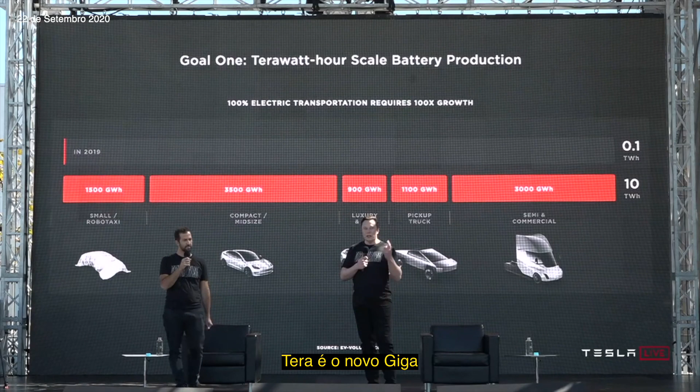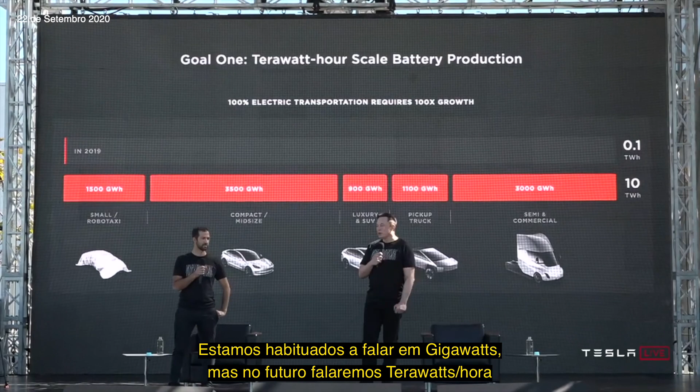Goal number one is a terawatt-hour scale battery production. Tera is the new giga. A terawatt is 1,000 times more than a gigawatt. So we used to talk in terms of gigawatts. In the future, we'll be talking in terms of terawatt hours. This is what's needed in order to transition the world to sustainability.

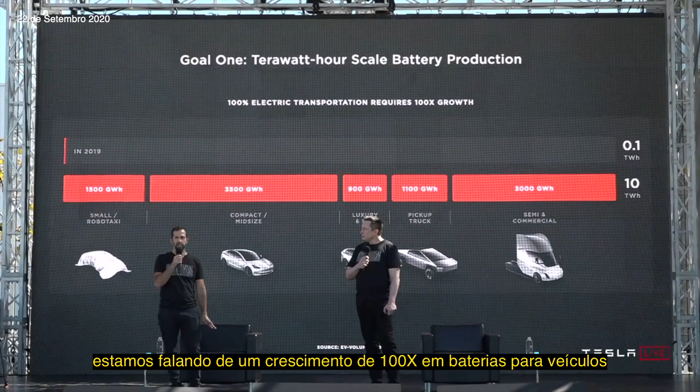And you can see we're talking about 100x growth in batteries for electric vehicles to achieve this mission. And we are going to get there. It's just a matter of how fast, and our intention is to accelerate it.

You basically need on the order of roughly 10 terawatt hours a year of battery production to transition the global fleet of vehicles to electric. And the average vehicle lasts 15 years, so we're talking about 150 terawatt hours, give or take, to transition all vehicles of all types to electric. So it's a lot of batteries, basically.

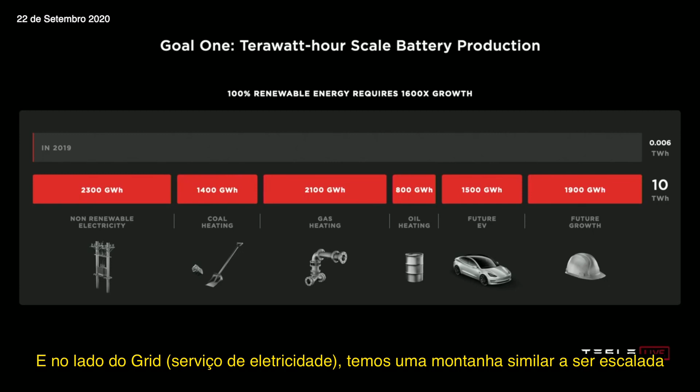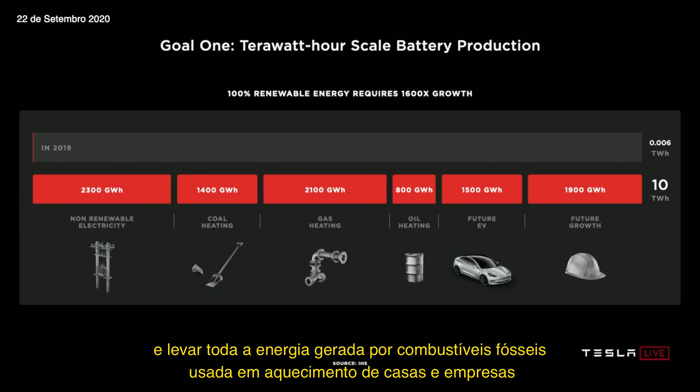And then on the grid side, we have a similar mountain to climb: 1,600 times growth from today's grid batteries to go 100% renewable on the grid and to take all of the existing heating fossil fuel uses in homes and businesses 100% electric. And this number, I think, might grow even more as the world economy matures and as countries with high populations industrialize, we could see this number be even more.

But let's say it's like roughly 20 to 25 terawatt hours per year, sustained for 15 to 25 years, to transition the world to renewable. This is a lot.

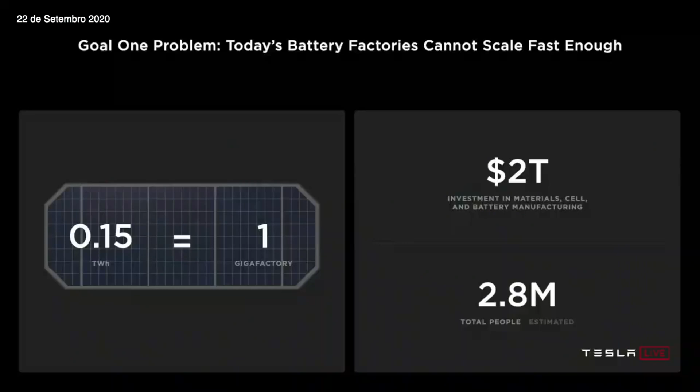So today's battery factories cannot scale fast enough. They're just too small. For Giga Nevada, 150 gigawatt hours per year is like what we probably expect to make out of there, but this is really pretty small in the grand scheme of things. That's only 0.15 terawatt hours. We would need 135 fully built out Nevada gigafactories to achieve 20 terawatt hours a year. It's not a scalable enough solution.

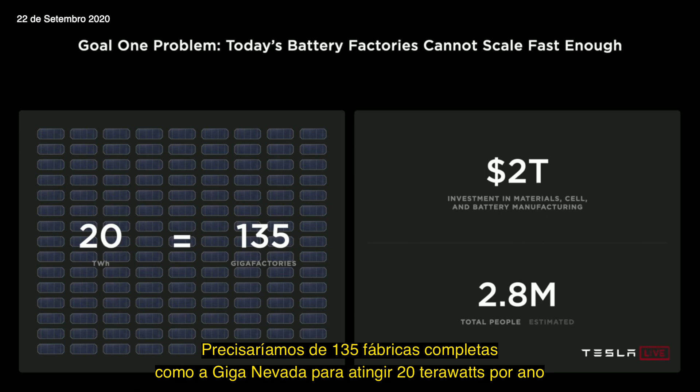We need a dramatic rethink of the cell manufacturing system to scale as fast as we can and should. It's not just a question of, well, if we had $2 trillion, tomorrow you could make this.

It's not that easy. You actually need to organize a massive number of people, build a lot of machines, build the machines that make the machines. And so it's incredibly important to have that effort yield the most number of batteries.

To make the best cars in the world, we design vehicles and factories from the ground up. And now we do this for batteries as well. So let's get started. We have a plan to halve the cost per kilowatt hour.

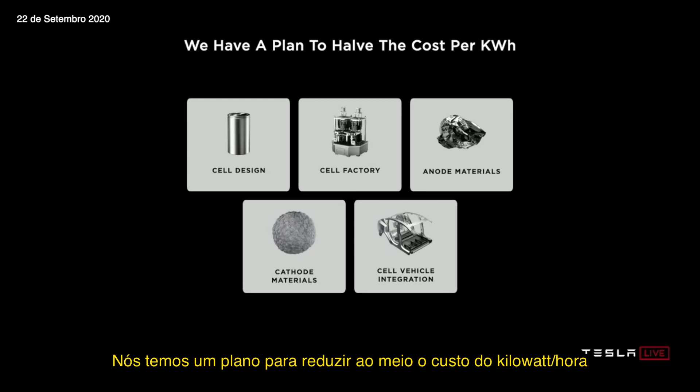And it's not a plan that rests on a single innovation, some research project that'll never see the light of day. We're going to go through that plan with you today, step by step, and build up how we get to these goals and how we accelerate this transition and make our vehicles and our grid batteries more affordable. We basically thought through every element of the battery, well, almost every element. There are a few more elements that we won't get to today, but we will get to in the future.

So first, before we get too far into it, let's talk about what is in a battery cell. We've got the cap and the can, negative and positive terminals of the cell. When you open that cell, you've got a tab connected to those terminals, what we call the jelly roll, which is the wound electrodes on the inside. You can actually see what this looks like as you unwind it. This is over 1 meter long in a typical 2170 cell, so it's quite a long winding process. And you can see the tab still there.

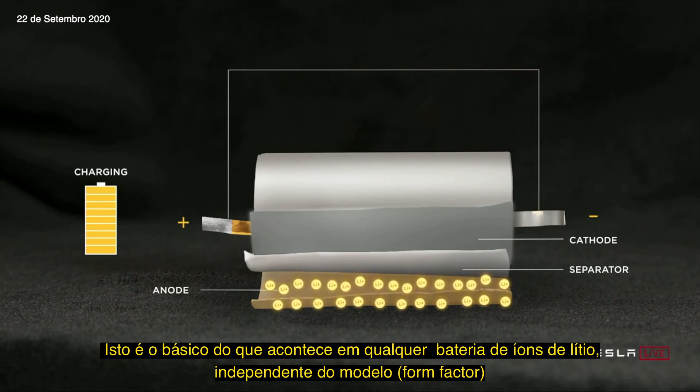To explain what's actually going on here, we've identified the anode, cathode, separator, and positive and negative terminal. Watch what happens as we discharge the cell: lithium moving from anode to cathode, and then the reverse. When we charge the cell, lithium moves from cathode to anode across the separator. This is the basic process behind all lithium-ion batteries, no matter what the form factor is.

When we look at what's happened to date, at least in our products, we've moved from the 18650 form factor to the 2170 form factor through great collaboration with our partners, Panasonic, and new partners like LG and CATL, and probably others in the future. This was an evolutionary step going from 18650 to 2170, bringing 50% more energy into the cell.

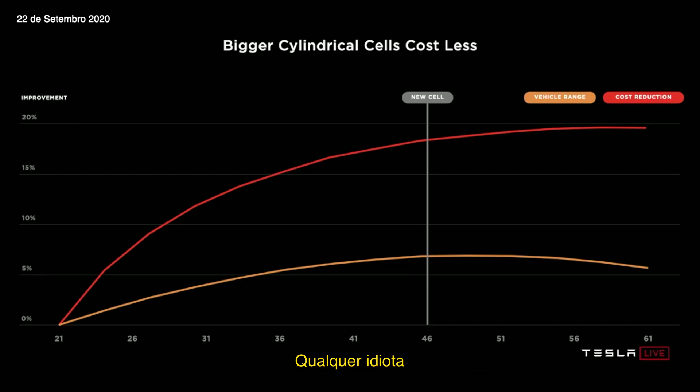But when we look to the ideal cell design, if we were to do it ourselves, we need to go beyond and study the full spectrum of options: how much we can reduce the cost and how much vehicle range increases as we change the outer diameter of the cell. But it's not just about a bigger form factor. Anybody could make a bigger form factor. Any fool could make a bigger form factor. We're not any fool.

There are problems as you make cells larger. In fact, supercharging and thermals in general become really challenging as you make bigger cells. This was the challenge that our team set our sights on to overcome, and we did. We came up with this tabless architecture that basically removes the thermal problem from the equation and allows us to go to the absolute lowest cost form factor and the simplest manufacturing process.

This is what we mean when we talk about tabless. We basically took the existing foils, laser patterned them, and enabled dozens of connections into the active material through this shingled spiral you can see. With simpler manufacturing, fewer parts, 50 millimeter versus 250 millimeter electrical path length, which is how we get all the thermal benefits. This is important to appreciate - basically the distance that electron has to travel is just much less.

So you actually have a shorter path length in a large tabless cell than you have in the smaller cell with tabs. This is a big deal. So even though the cell is bigger, it actually has more power. The power to weight ratio is actually better than the smaller cell with tabs.

This is quite hard to do, so nobody's done it before. Sometimes what's elegant and simple is still hard, and it took us a lot of trials, but we're happy where we ended up. It may sound a bit silly to some people, but for people that really know cells, this is a massive breakthrough.

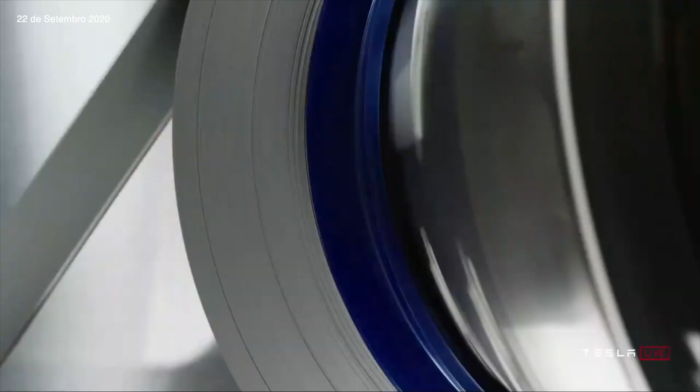It's a video of some of what's going on in the plant.

To be clear, it will take about a year to reach the 10 gigawatt hour capacity. This is important to appreciate. When you build a factory, there's a certain capacity that you design to, and then it takes some period of time to actually achieve that capacity. So I'd say it's probably about a year before we get to the 10 gigawatt hour annualized rate with the pilot plant. And this is just a pilot plant. The actual production plants will be more on the order of maybe 200 gigawatt hours, maybe more over time.

So just the cell form factor change enables a 14% dollar per kilowatt hour reduction, just that cell form factor change.

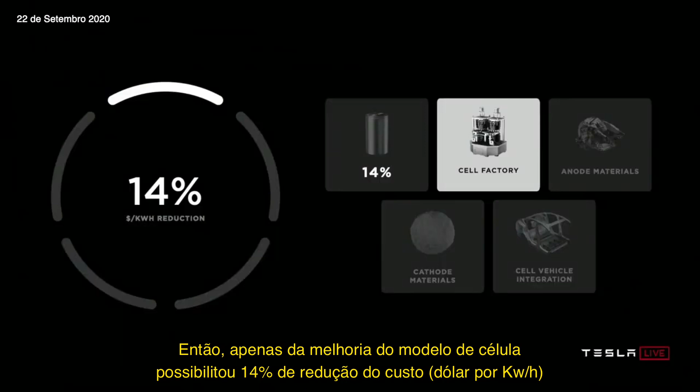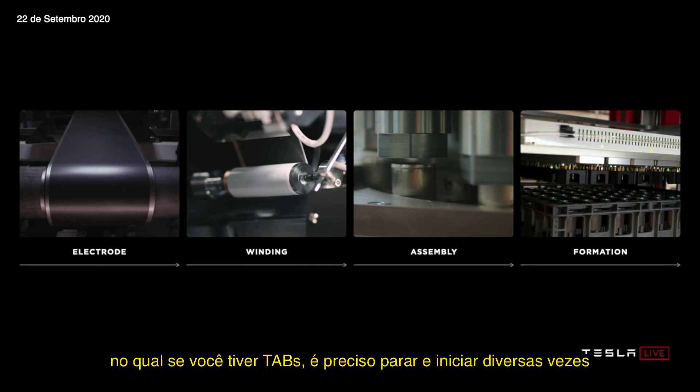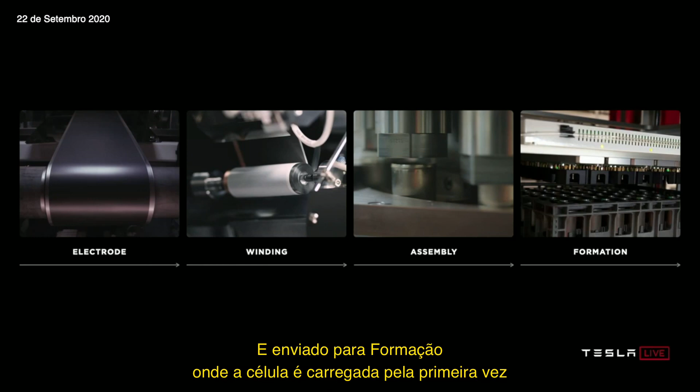Let's talk about what's in a cell factory. First, there's an electrode process where the active materials are coated into films onto foils. Then those coated foils are wound in the winding process we just talked about, where if you do have tabs, you have to start and stop a lot. Then the jelly roll is assembled into the can, sealed, filled with electrolyte, and sent to formation, where the cell is charged for the first time, and where the electrochemistry is set and the quality of the cell is verified.

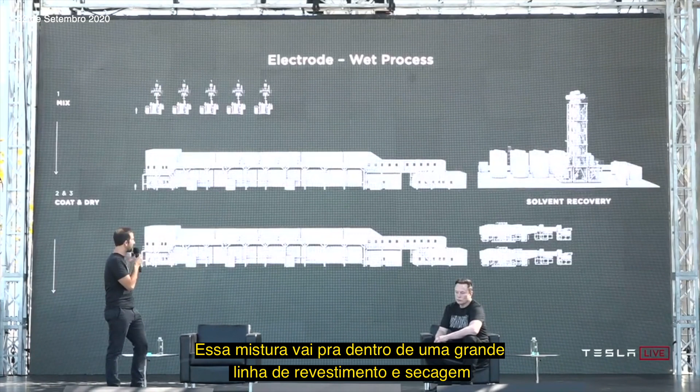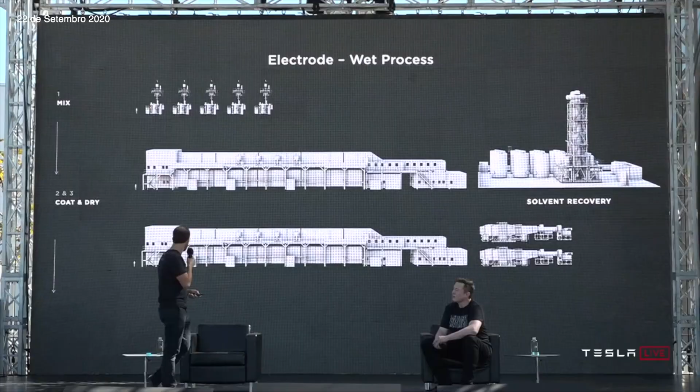One of the most important processes is where it all begins, the wet process of the electrode coating. To give you a sense of scale, I'm going to walk through that wet process. You've got mixing, where the powders are mixed with either water or a solvent, solvents for the cathode. That mix goes into a large coat and dry oven, where the slurry is coated onto the foil, huge ovens, tens of meters long, dried, and that solvent then has to be recovered. You can see the solvent recovery system. Then finally, the coated foil is compressed to the final density.

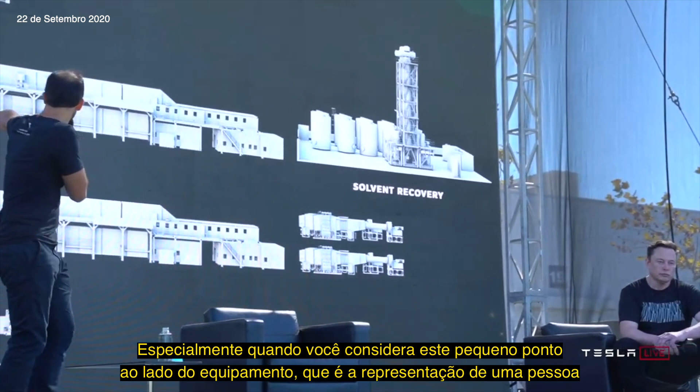When you're looking at this, you're like, wow, that's a lot of equipment for one step, especially when you consider that little speck next to the coating oven is a person. This is serious iron involved in making batteries.

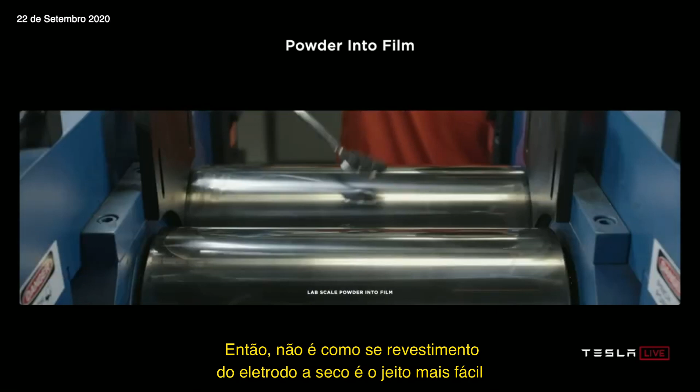Wouldn't it be great if we could skip that solvent step, which is one of those dig a ditch and then fill it kind of things, where you put the solvent in and then take it out and recycle it, and just go straight to dry mix to coat? That's what the dry process really is about. In the most basic form, you can see it here on a bench top. Literally, powder into film, as simple as that. I mean, it's hard, actually, just to be clear. If this was easy, everyone would do it. It's not like dry coating electrode is actually easy. It's actually very hard to do what appears to be a simple thing. It's insanely difficult to scale up.

But as Elon was saying, simple is hard. Yeah, and beyond the electrode, we continue to innovate on every other process step. So let's talk a little bit about assembly, which is next.

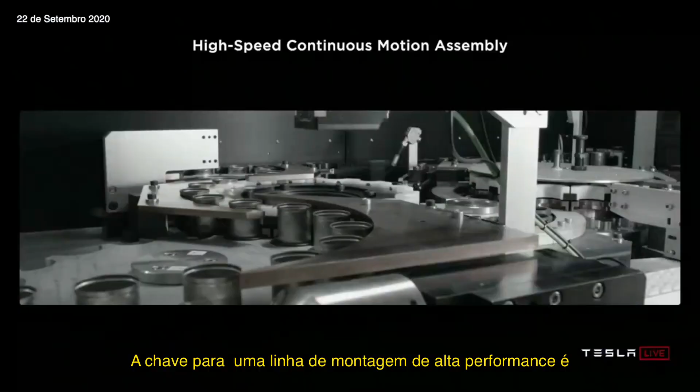The key to a high-performing assembly line is accomplishing processes while in continuous motion, and thinking of the line as a highway, max velocity down the highway, no start and stop, no city driving. Exactly, no stoplights or anything. You want the highway. I want the highway.

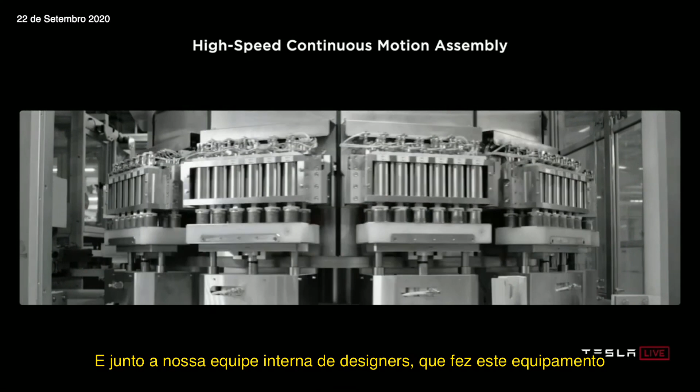Together with our internal design team that makes and designs this equipment, we coupled thinking about how to make the best cell with thinking about how to make the best equipment, so that we could accomplish the fastest parts per minute rates on all of these tools.

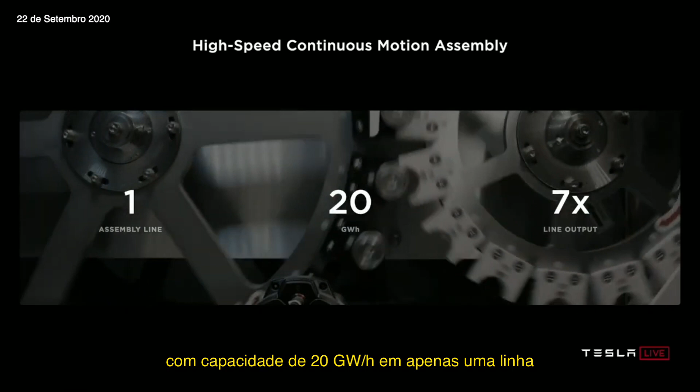Through all of that development, we were able to get to the point where we can implement assembly lines, one line, 20 gigawatt hours, 7 times increase in output per line. When you're thinking about scalability and pure effort, having one line be 7x the capability is just effort multiplying.

Like if a factory that's moving at twice the speed of another factory is equivalent to two factories, basically. And the company that will be successful is the company that, with one factory, can accomplish what other companies take 2, 3, or 4 factories to do. So this is what we're trying to do here: how do we, with one factory, achieve what maybe 5 or even 10 factories would normally be required to achieve?

The vertical integration with the machine design teams at Grohmann and Hibar and others allows us to really accomplish that, because we don't have all these edge conditions between one piece of equipment and another. We can design the entire machine to be one machine and remove all of these unnecessary steps.

Basically, Tesla is aiming to be the best at manufacturing of any company on Earth. This is the thing that's actually most important in the long run. Eventually, every car company will have long-range electric cars. Eventually every company will have autonomy, I think, but not every company will be great at manufacturing. Tesla will be absolutely head and shoulders above anyone else in manufacturing. That is our goal. Okay, now let's talk about formation.

In a typical cell factory, formation represents 25% of the investment. And what is formation? It's charging and discharging cells and verifying the quality of the cell. Turns out we've charged and discharged billions and billions of cells in our vehicles, so we know a thing or two about that.

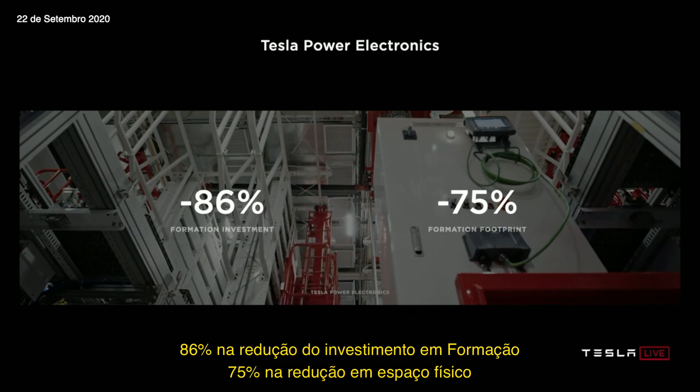The typical formation setup is you charge and discharge each cell individually. In our car, we charge thousands of cells at once. We took our principle and our power electronics, leveraging Powerwall, vehicle battery management systems, and others, to dramatically improve the formation equipment cost effectiveness and density: an 86% reduction in formation investment, 75% reduction in footprint.

So, you want to take this one? Sure. Essentially, what this translates to, based on what we know today, is about a 75% reduction in the investment per kilowatt hour. Basically, 4 times better than the current state of the art, to the best of our knowledge. I think there's probably room to improve even beyond that.

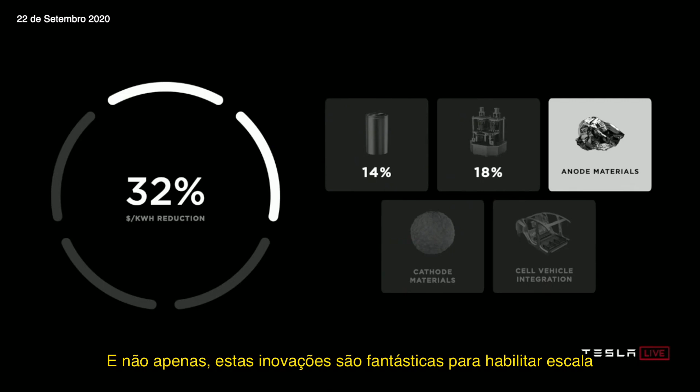Definitely, yeah. So, pretty profound. I would actually not have thought this was possible several years ago. This is just talking about Tesla internal cell production. We will continue to use our cell suppliers, Panasonic, LG, and CATL. So this is 100 gigawatt hours supplemental to what we buy from suppliers. Not only is all of that manufacturing innovation fantastic for enabling scale, it's also an additional 18% reduction in dollar per kilowatt hour at the battery pack level.

But wait, there's more. So we have a manufacturing system, we've got a cell design. What are the active materials we're going to put in that cell design? Let's talk about the anode first, let's talk about silicon.

Why is silicon awesome? It's awesome because it's the most abundant element in the Earth's crust after oxygen, which means it's everywhere. It's sand. Sand is silicon dioxide. And it happens to store 9 times more lithium than graphite, which is the typical anode material in lithium-ion batteries today. So why isn't everybody using it?

The main reason is because the challenge with silicon is that it expands 4x when fully charged with lithium.

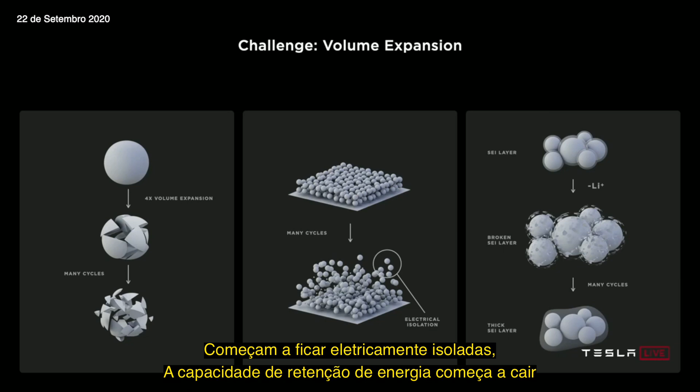All of that expansion stress on the particles causes them to start cracking, they start electrically isolating, you lose capacity, the energy retention of the battery starts to fade, and it also gums up with a passivation layer that has to keep reforming as the particles expand.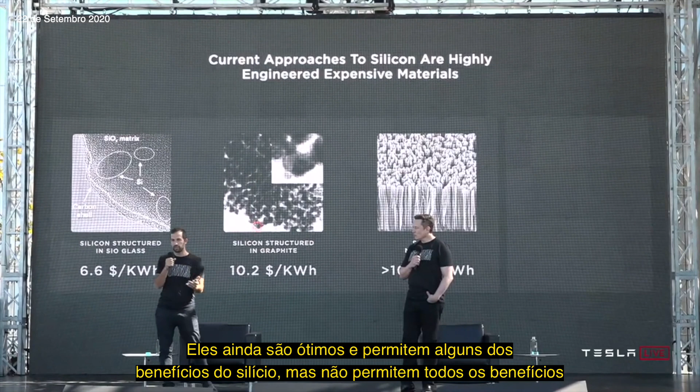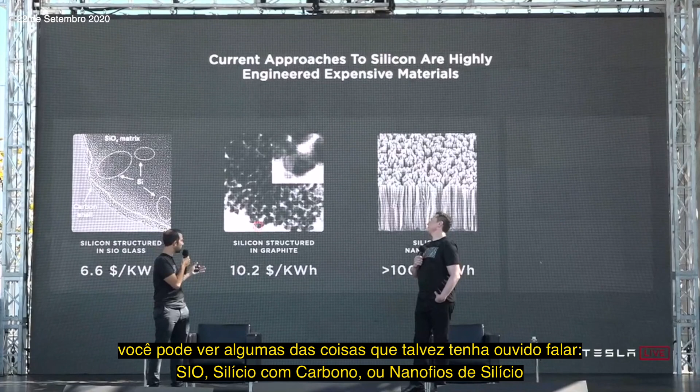Current approaches to solve this, which exist - I mean, we have silicon in the cars you're all in right now - involve highly engineered, expensive materials in the scheme of things. Now, they're still great, and they enable some of the benefits of silicon. They just don't enable all of it, and they're not scalable enough. You can see some of the things you may have heard of: SiO, silicon with carbon, or silicon nanowires. That's kind of the space right now.

What we're proposing is a step change in capability and a step change in cost. And what that really is, is to just go to the raw metallurgical silicon itself. Just start with that and design for it to expand. Think of the particle in the electrode design and how you coat it.

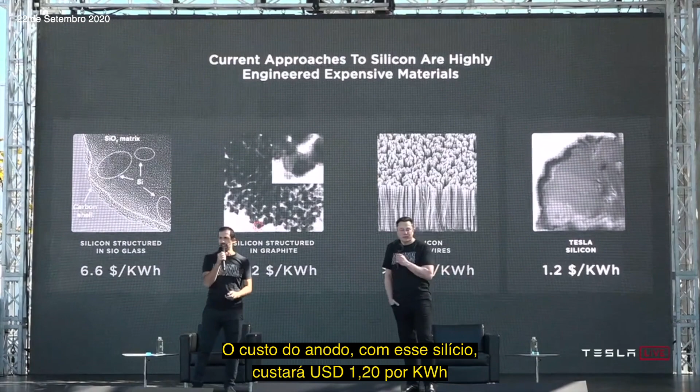Basically, if you use simple silicon, it's dramatically less expensive than even the silicon that is currently used in batteries made today, and you can use a lot more of it. The anode would cost, with this silicon, $1.20 a kilowatt hour.

And how does it work? Start with raw metallurgical silicon, stabilize the surface with an elastic ion conducting polymer coating that is applied through a very scalable approach - no chemical vapor deposition, no highly engineered high capex solutions - and then integrate it into the electrode through a robust network formed out of a highly elastic binder.

In the end, by leveraging this silicon to its potential, we can increase the range of our vehicles by an additional 20%, just with this improvement. It gets cheaper and longer range. When we take that anode cost reduction, we're looking at another 5% dollar per kilowatt hour reduction at the battery pack level. And there's more.

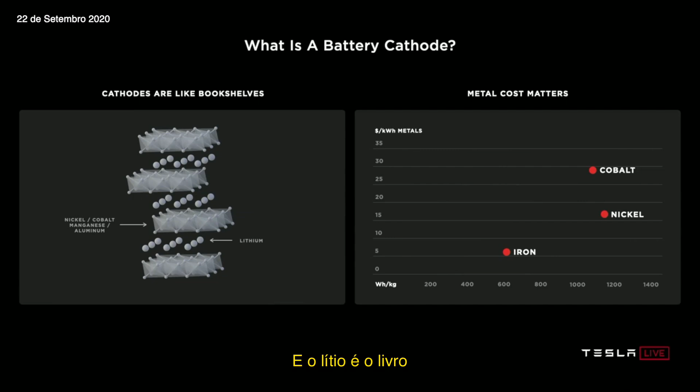Let's talk about cathodes. What is a battery cathode? Cathodes are like bookshelves where the metal - the nickel, the cobalt, the manganese, or aluminum - is like the shelf, and the lithium is the book. What sets apart these different metals is how many books of lithium they can fit on the shelves and how sturdy the shelves are.

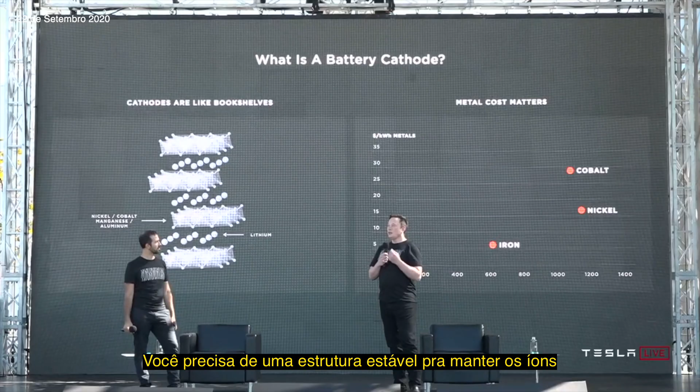You need a stable structure to contain the ions. So you want a structure that does not crumble or get gooey, that holds its shape in both the cathode and the anode. As you're moving these ions back and forth, it needs to retain its structure. If it doesn't retain its structure, then you lose cycle life and your battery capacity drops very quickly.

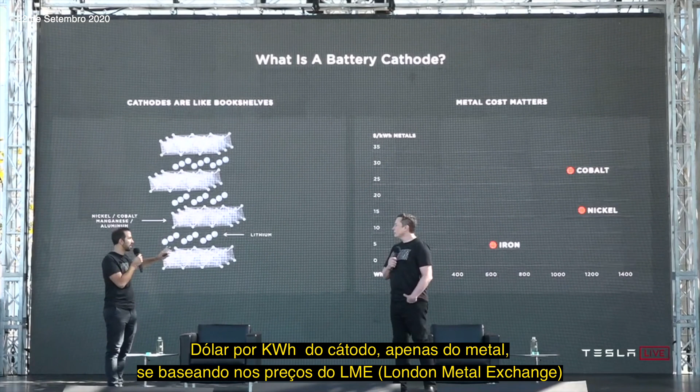Dollar per kilowatt hour cathode of just the metal, using London Metal Exchange prices, versus the energy density of just the cathode - you can see nickel is the cheapest and the highest energy density, and that's why increasing nickel is a goal of ours, and really everybody's, in the battery industry.

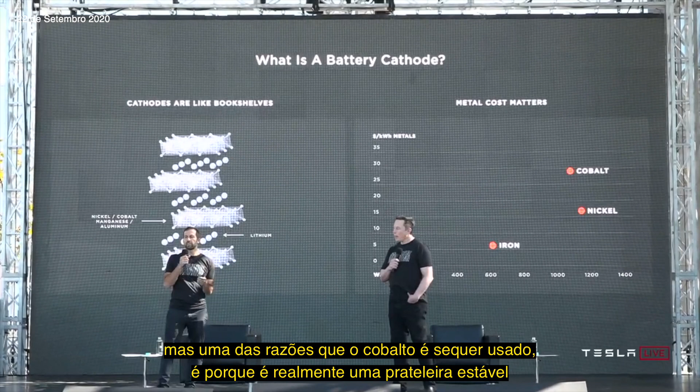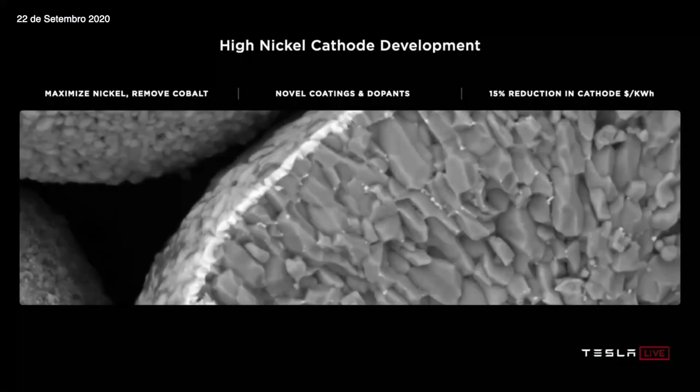But one of the reasons why cobalt is even used at all is because it is a very stable bookshelf. The challenge with going to pure nickel is stabilizing that bookshelf with only nickel. That's what we've been working on with our high nickel cathode development, which has zero cobalt in it. Leveraging novel coatings and dopants, we can get a 15% reduction in cathode dollar per kilowatt hour.

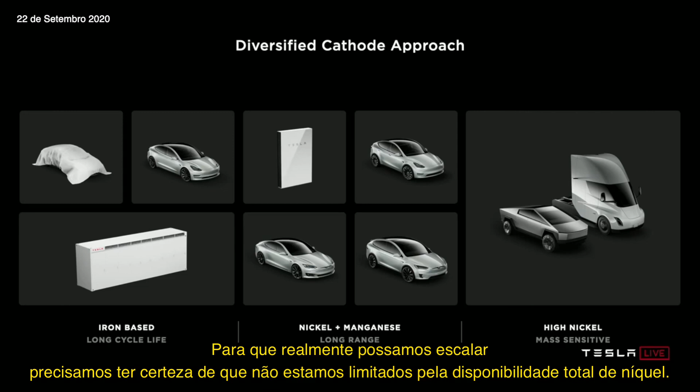So in order to scale, we really need to make sure that we're not constrained by total nickel availability. I actually spoke with the CEOs of the biggest mining companies in the world and said, please make more nickel. It's very important. And so I think they are going to make more nickel.

But I think we need to have a kind of three-tiered approach to batteries: starting with iron, that's kind of like a medium range, then nickel manganese as sort of a medium-plus intermediate, and then high nickel for long range applications like Cybertruck and the semi. Because something like a semi truck, it's extremely important to have high energy density in order to get long range.

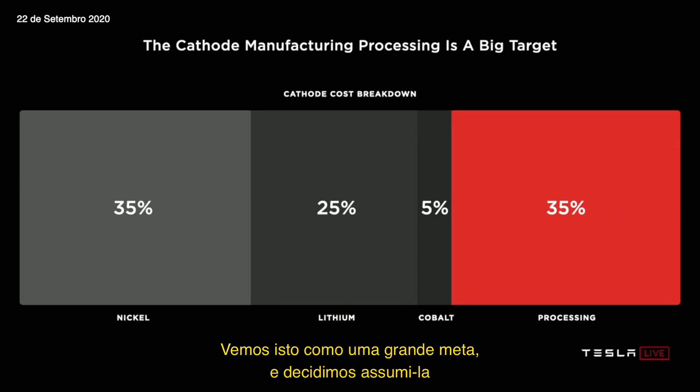Beyond the metals, because a lot of people spend time talking about the metals, actually the cathode process itself is a big target. 35% of the cathode dollar per kilowatt hour is just in transforming it into its final form. So we see that as a big target, and we decided to take that on.

Here's a view of the traditional cathode process. If you start at the left, you have the metal from the mine. The first thing that happens is the metal is changed into an intermediate thing called a metal sulfate. Then when you're making the cathode, you take this metal sulfate, add chemicals, add a whole bunch of water, a whole bunch of stuff happens in the middle, and at the end you get that little bit of cathode and a whole bunch of wastewater and byproducts.

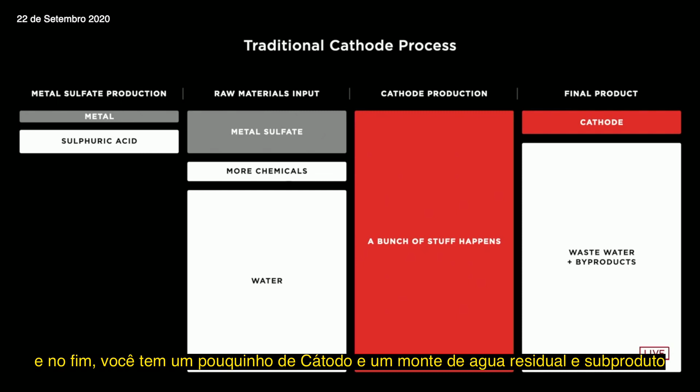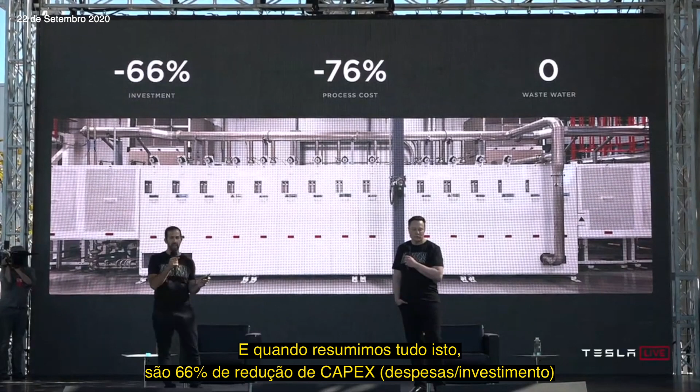That's what we're proposing here with our process. As you can see, a whole lot less is going on. We get rid of the intermediate, metal, water, final product cathode, and recirculate the water - no wastewater at all. When you summarize all of that, it's a 66% reduction in CapEx investment, a 76% reduction in process cost, and zero wastewater. Much more scalable solution.

When you think about the fact that now we're actually just directly consuming the raw metal nickel powder, it dramatically simplifies the metal refining part of the whole process. So we can eliminate billions in battery-grade nickel intermediate production. It's not needed at all.

We can also use that same process we showed on the previous page to directly consume the metal powder coming out of recycled electric vehicle and grid storage batteries. So this process enables both simpler mining and simpler recycling.

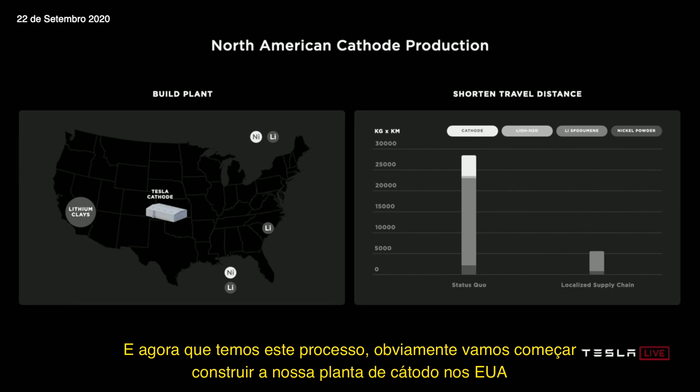Now that we have this process, we're going to go and start building our own cathode facility in North America, leveraging all of the North American resources that exist for nickel and lithium. Just by localizing our cathode supply chain and production, we can reduce miles traveled by all the materials that end up in the cathode by 80%, which is huge for cost.

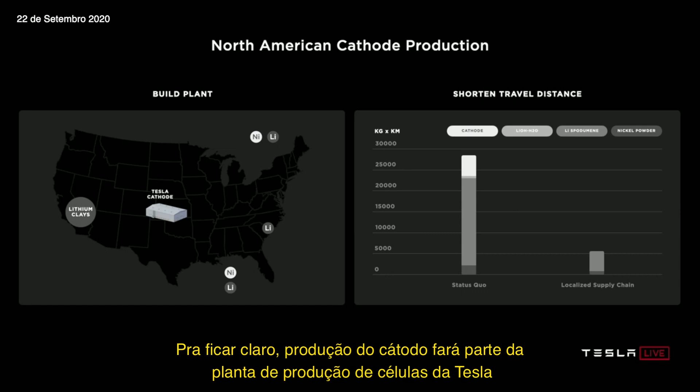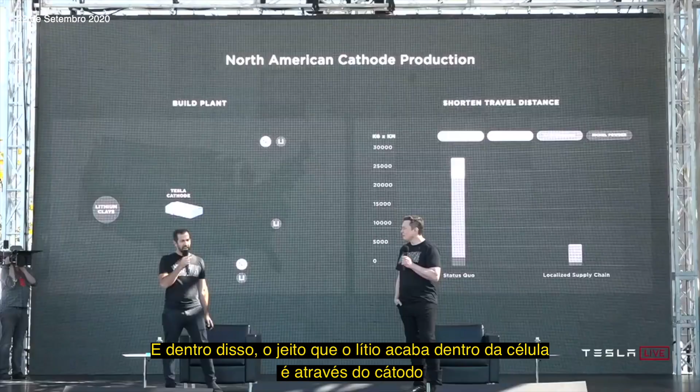To be clear, cathode production would be part of the Tesla cell production plant. So it would basically be raw materials coming from the mine, and out comes a battery. And on that note, the way the lithium ends up in the cell is through the cathode.

So we should obviously do on-site lithium conversion as well, which is what we will do using a new process that we're going to pioneer. That's a sulfate-free process again, skipping the intermediate - 33% reduction in lithium cost, 100% electric facility co-located with the cathode plant.

It's important to note that there is a massive amount of lithium on Earth. Lithium is not like oil - there's a massive amount of it pretty much everywhere. But it is important to ask: what is the smartest way to take the ore, extract the lithium, and do so in an environmentally friendly way?

We discovered, looking at it from a first principles physics standpoint instead of just the way it's always been done, that we can actually use table salt, sodium chloride, to extract the lithium from the ore. Nobody's done this before, to the best of my knowledge. All the elements are reusable - it's a very sustainable way of obtaining lithium.

We actually got rights to a lithium clay deposit in Nevada - over 10,000 acres. The nature of the mining is also very environmentally sensitive: we take a chunk of dirt out of the ground, remove the lithium, and then put the chunk of dirt back where it was. So it will look pretty much the same as before, not terrible - it'll be nice.

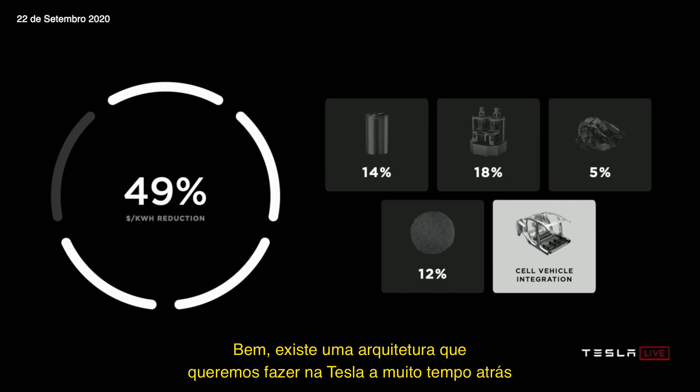So there's an architecture that we've been wanting to do at Tesla for a long time, and we finally figured it out. I think it's the way that all electric cars in the future will ultimately be made. It's the right way to do things.

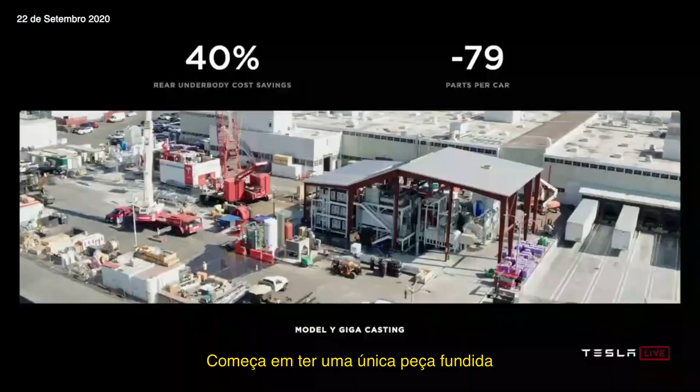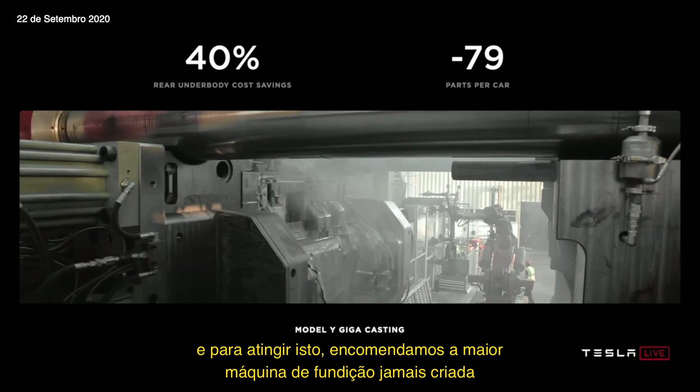So it starts with having a single piece casting for the front body and the rear body. In order to do this, we commissioned the largest casting machine that has ever been made, and it's currently working just over the road at our Fremont plant. It's pretty sweet.

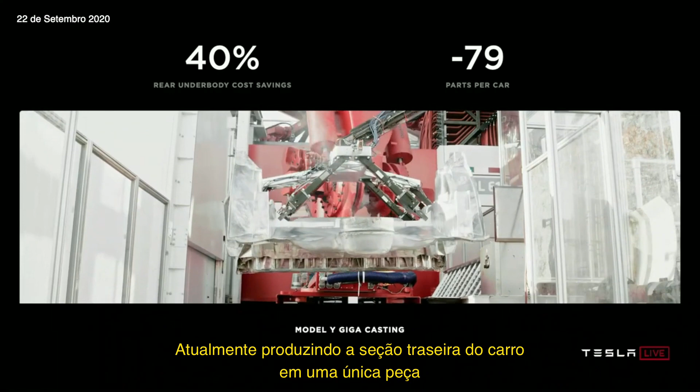We're currently making the entire rear section of the car as a single piece, high pressure die cast aluminum. In order to do this, we actually had to develop our own alloy because we wanted a high strength casting alloy that did not require coatings or heat treatment. This is a big deal for castings, especially with a large casting - if you heat treat it afterwards, it tends to deform, so it's very hard to keep a large casting holding its shape.

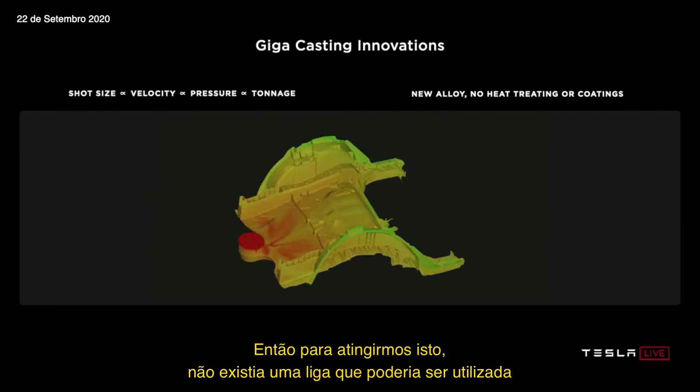So to achieve this, there was no alloy that existed that could do it, so we developed our own special alloy of aluminum that has high strength without heat treat and is very castable. That's a great achievement of our materials team. In fact, in general, we've got a lot of advanced materials coming for Tesla - new alloys and materials that have never existed before.

So you're basically making the front and rear of the car as a single piece, and that then interfaces to what we call the structural battery, where the battery for the first time will have dual use - it will both serve as an energy device and as structure. This is absolutely the way things are done.

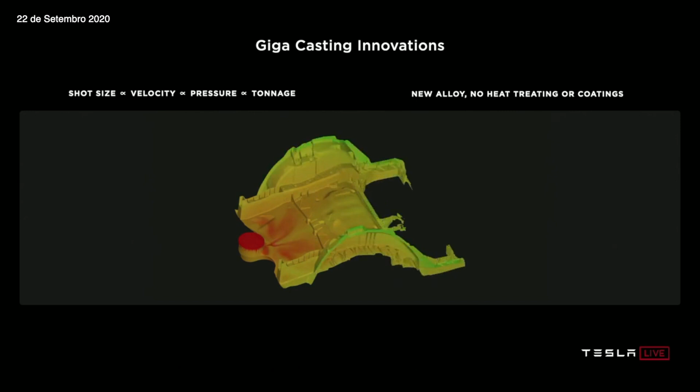In the early days of aircraft, they would carry the fuel tanks as cargo. It was very difficult, and then somebody said, hey, what if we just make the wing tanks - what if we just make the fuel tank in wing shape? So all modern airplanes, the wing is just a fuel tank in wing shape. This is absolutely the way to do it. The fuel tank serves as dual structure and is no longer cargo - it's fundamental to the structure of the aircraft. This was a major breakthrough. We're doing the same for cars.

This is really quite profound. Effectively, the non-cell portion of the battery has negative mass - we save more mass in the rest of the vehicle than the non-cell portion of the battery adds.

It also allows us to pack the cells more densely because we do not have intermediate structure in the battery pack. Instead of having supports, stabilizers, stringers and structural elements in the battery, we now have a lot more space because the pack itself is structural. Instead of having just a filler that is flame retardant, which is currently what is in the 3 and Y battery packs, we have a filler that is a structural adhesive as well as flame retardant.

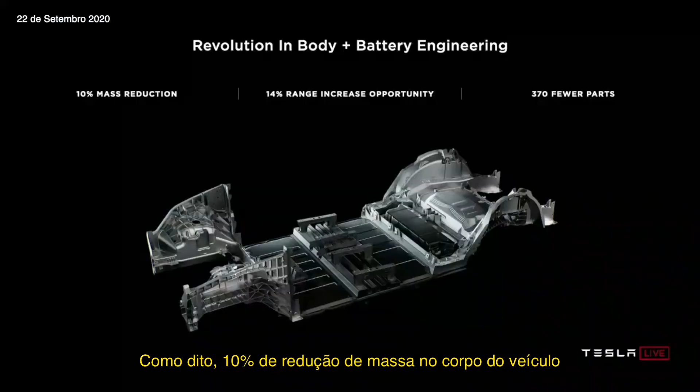So, 10% mass reduction in the body of the car, 14% range increase, and 370 fewer parts.

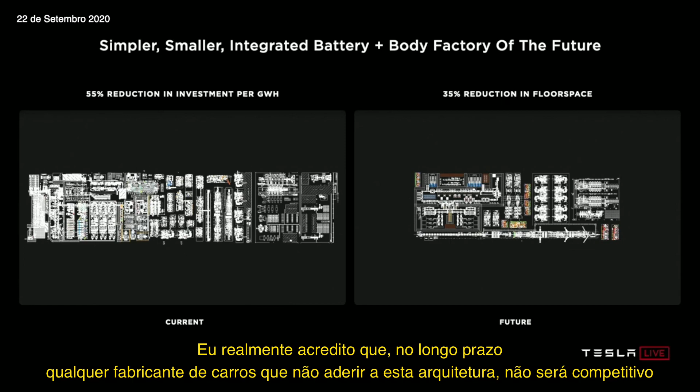I really think long term that any cars not taking this architecture will not be competitive. It's not just a better product—in the factory it's a massive simplification. You saw the part removal, the casting machines, the structural battery pack. We're looking at over 50% reduction in investment per gigawatt hour, 35% reduction in floor space, and we'll continue improving as we build the vehicle factory of the future. So it's major improvements on all fronts, from the cell all the way to the vehicle.

In addition to enabling additional range and improving the structural performance of the vehicle, this is worth another 7% dollar-per-kilowatt-hour reduction at the battery pack level, bringing our total reduction to 56% dollars per kilowatt hour.

So stacking it up, we're not just talking about cost or range—we've got to look at all the facets. Range increase, up to 54%, 56% reduction in dollars per kilowatt hour at the battery pack level, and a 69% reduction in investment per gigawatt hour. This enables us to achieve a new trajectory in the reduction of cell cost. To be clear, it will take us probably a year to 18 months to start realizing these advantages, and probably about 3 years to fully realize them.